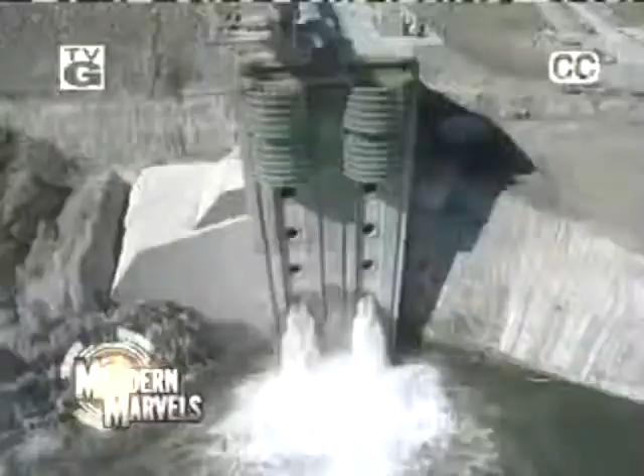It takes water to make cities grow. And without water, cities would die. New York, Chicago, and Los Angeles need billions of gallons a day, from rivers and reservoirs to the water tap. A vast hidden network of tunnels, pipes, and pumps. Some are cutting edge, and some are a century old. Now, City Water on Modern Marvels.

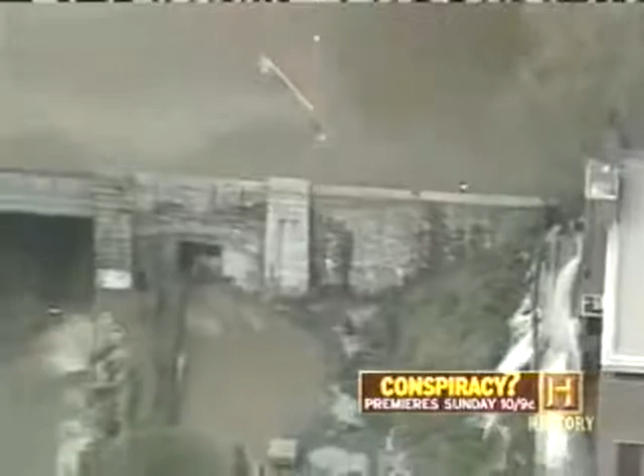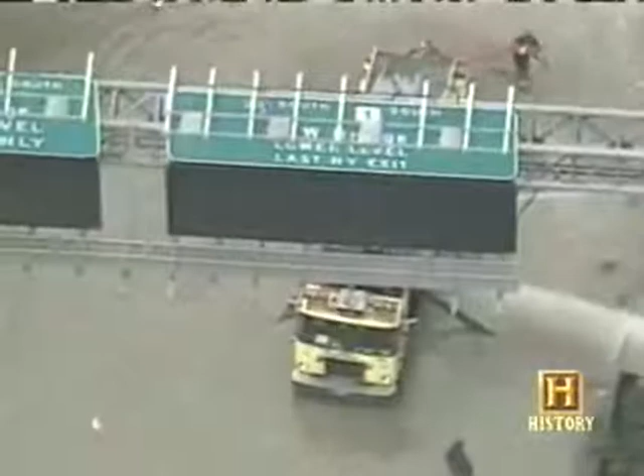October 2003. A 108-year-old New York City water main carrying more than 1 million gallons an hour suddenly burst, and swirling whitewater rapids surged through an area of several square blocks. The disruption, dislocation, and damage were dramatic. The incident pointed out how fragile and yet indispensable city water systems are. Most of us take them for granted until there's a problem.

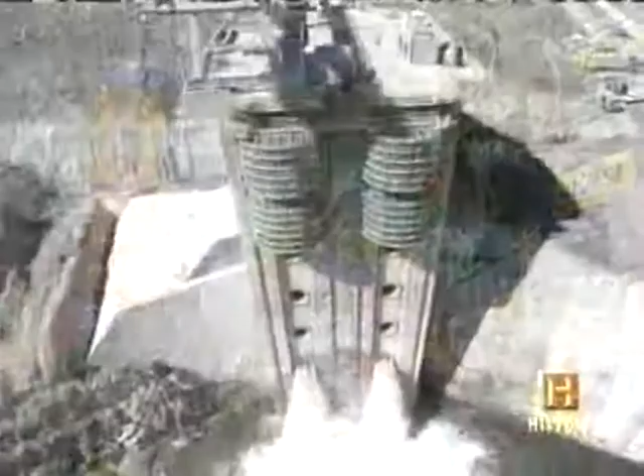When most Americans turn on a faucet, they expect clean, pure water to flow out. They also expect their city to have plenty of water for industries, for fighting fires, and for cleaning streets. Public water supply systems in the United States provide all those things for 99% of the population. Over 250 million people. Water supply is empowering. There are so many things that can happen when you have a water supply, and so many things that don't happen when you don't have a water supply.

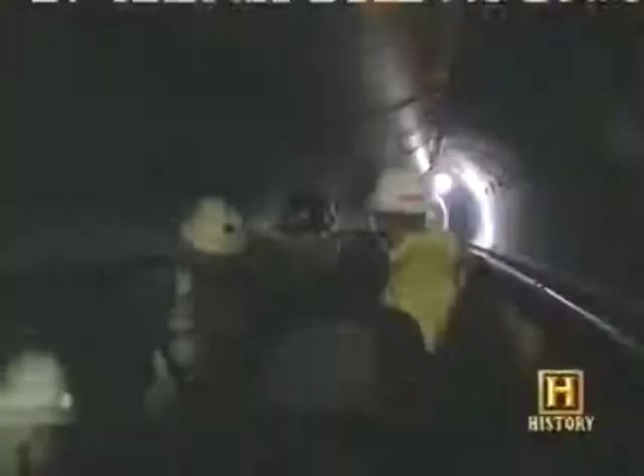On average, Americans use about 100 gallons of water per person every day. And public water works in the U.S. supply about 40 billion gallons daily. It truly is an invisible empire. There are thousands of miles of these aqueducts and tunnels all underneath the city, crisscrossing and moving. There's very little space down there. They've built so much. And like the men who built the skyscrapers up, these guys have built the skyscrapers down. Some of the technology used in today's city water systems has been around for millennia.

Sanskrit writings from 4,000 years ago talk about the importance of purifying drinking water and describe various methods, including boiling over a fire and filtering through sand or charcoal. 2,700 years ago, qanats, sloping tunnels carrying groundwater, were being used in northwestern Persia. The qanats are basically horizontal wells that are used for irrigation. These were developed originally in what's today Iran. They spread throughout the area into areas like Spain, into parts of China.

Around 312 BC, 4 centuries after qanats first appeared in Persia, construction on the renowned aqueduct system of ancient Rome began. An extraordinary feat of engineering. They brought water to the city from as far as 57 miles away. Over a period of 500 years, 11 aqueducts were built to bring water to Rome, and some sections are still functioning today.

Ancient Mayans in the Yucatan Peninsula got their fresh water from naturally formed underground sinkholes called cenotes, to which they attached great religious significance. The Maya considered the cenotes portals to the underworld, where they would journey in the afterlife to meet gods and ancestors. Probably the most well-known one is the cenote at the big site of Chichen Itza in Yucatan State. And this has yielded a tremendous amount of materials, offerings that were tossed in over the years. Fancy pottery, and very late in the history, gold, and a few humans, for good measure.

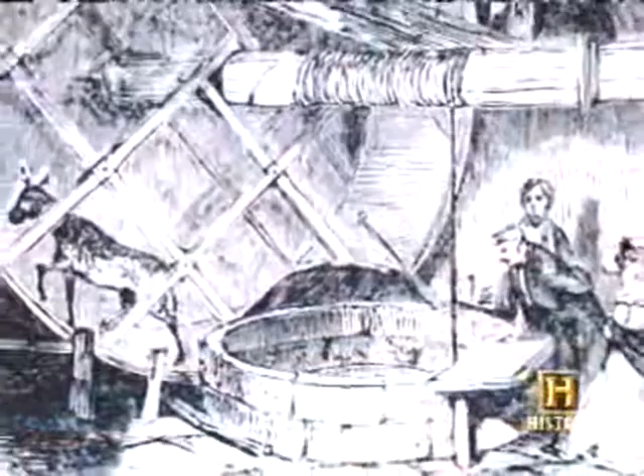Residents of medieval London might have been envious of the Mayan reservoirs. At the beginning of the 13th century, the increase in London's population was creating a growing pollution problem in the existing water supplies, which came from local wells and the Thames River. Across all of London there were these cesspits, and there were, of course, these wells, sometimes right next to each other, in ways that were just extraordinary. In 1236, construction was authorized on the Great Conduit, which would bring drinking water to the city from a spring at Tyburn, 3 miles away.

Eventually, several conduit houses were built in London. The stone buildings were not only used for storing and dispensing water, they also served as social centers. This was a place where people gathered during festival times. They decorated the sides with garlands, they painted slogans on it, and on real special occasions, like the coronation of Anne Boleyn in 1533, they stopped the flow of water and put wine in so that everybody could have wine delivered to them.

Still, many Londoners continued to get their drinking water from the Thames River, despite the pollution from human and animal waste dumped in the river. The resulting illnesses weren't associated with the pollution because of lack of knowledge of the microorganisms that cause disease. Sometimes the night air was blamed for certain types of death that would come.

Every summer it was almost regular, however, that the so-called sweating sickness would come in, which is probably a type of typhoid that we know now. But they didn't know it. Like the residents of medieval London, early New Yorkers were completely unaware that their drinking water was making them sick. And thousands would die of waterborne diseases, like cholera, before they made the connection.

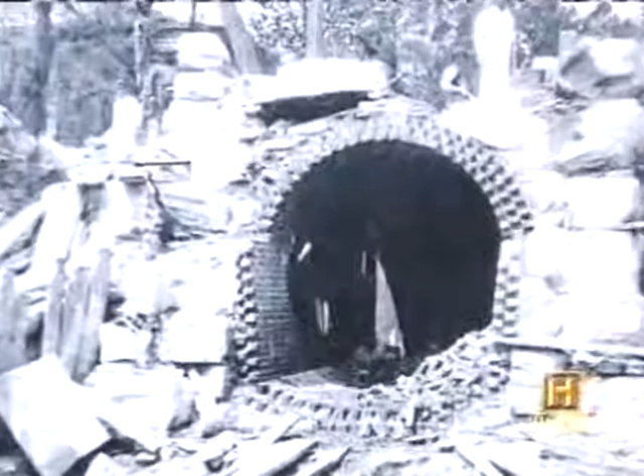The attempt to bring fresh water to New York City would lead to some of the great water projects of the 19th century. Manhattan's fresh water initially came from shallow private wells, until the first public well was dug in 1677, in front of the old fort at Bowling Green. By the late 1770s, Manhattan's 22,000 residents were getting most of their drinking water from the highly polluted Collect Pond in the heart of the city.

Because people were bathing in the Collect, it quickly became dirty. It became incredibly fetid. There was a dead body which occasionally washed up in it from a crime scene. People would find dead animals, feces. The contaminated water led to a disastrous cholera epidemic in 1832. It went from hundreds and then into the thousands of people who died from that epidemic. Kids would plead for water, and the water that they would give them was the very thing that was making them sick and only made the epidemic worse.

The situation deteriorated even further in 1835 when a small fire broke out in a single building on Wall Street. It was a cold winter night. Wells were frozen over, and so were the rivers. And within 24 hours, all of Lower Manhattan was ablaze and in ruins. Millions of dollars equivalent were lost from business and industry. One of the worst disasters in the history of the United States.

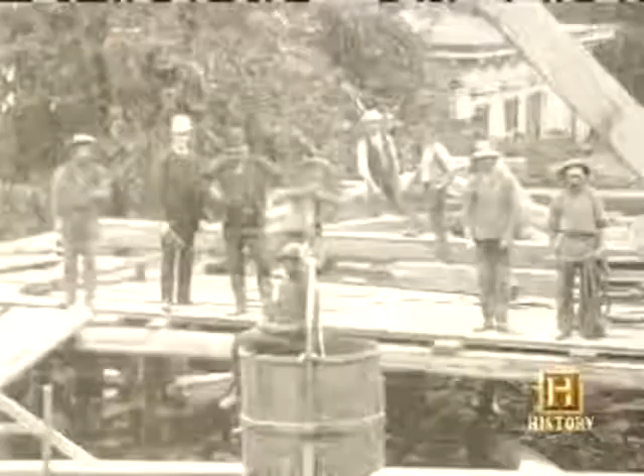And it was these events, these really cataclysmic events, that finally set New York on a concerted program to say, we need to solve this crisis. How can we do it? In 1837, construction began on the Croton Aqueduct, which still carries water to New York City today, providing about 10% of the city's water supply.

The 30-mile-long brick pipeline, extending from the Croton Reservoir along the east bank of the Hudson River to downtown New York City, took 5 years to complete, with up to 4,000 laborers on the job at one time. In 1842, when the aqueduct finally went into service, President Tyler and former presidents John Quincy Adams and Martin Van Buren came to the Big Apple for the opening ceremony and watched water gush for the first time from the Croton Fountain near City Hall.

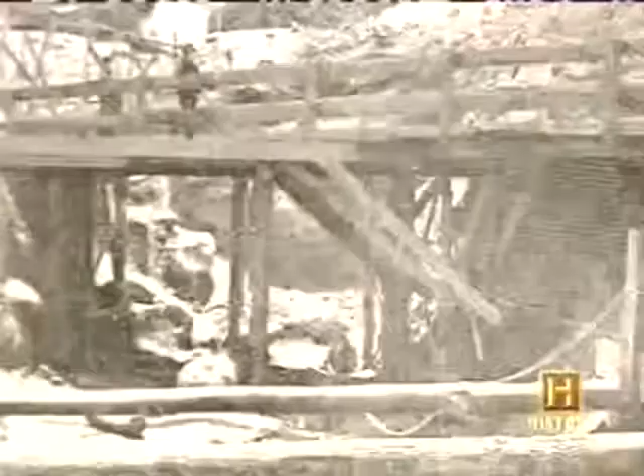People recounted in elaborate fashion their first bath, their first shower. It's hard to imagine what it was like to be able to go into your house, turn on a tap, and have water. The Croton Aqueduct was considered an architectural marvel. Most of it was an 8-by-7-foot arched tube of brick and stone, buried 15 to 30 feet beneath the ground.

But there were elevated sections like the High Bridge, an arched brick overpass that took the aqueduct across the Harlem River to Manhattan. It became a popular tourist attraction in the late 1800s, with sightseers traveling 8 miles from the city to stroll across the 1,400-foot-long span.

Then, as always happens, because of the supply of water, because of the nature of New York City, the city quickly expanded, and already within 12 years, there was an editorial in the New York Times saying, we need more water, we need more water. When you think of the immigration that was occurring in the end of the 1800s, New York was just exploding, and that Croton network just wasn't able to meet water supply demands.

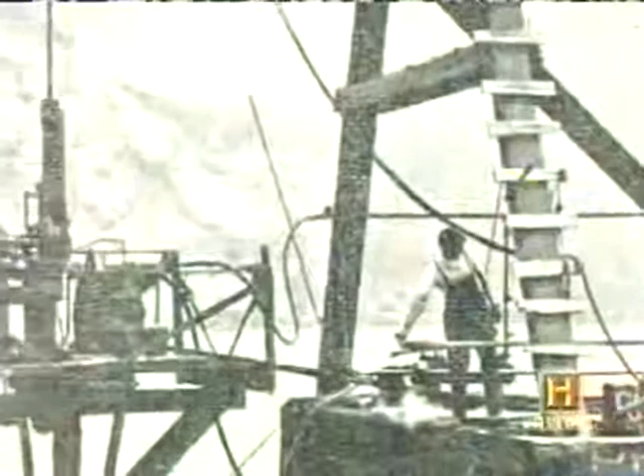And this time, they looked even further afield, and this time, their plan and vision was even bolder. What they did is they decided to build an aqueduct all the way out to the Catskill Mountains. The new aqueduct from the Catskill Mountains would be 92 miles long, 3 times as long as the Croton Aqueduct. It would run down alongside the Hudson River and at one point cross the river.

This is another hand-built aqueduct. This was the working man. Down there with sticks of dynamite and steam locomotives and mules hauling all that rock out. With the Croton Aqueduct, they decided to cross the river in the aqueduct above the river.

With the Catskill Aqueduct, they decided to go beneath it. And for over a year, they would sit on these boats pitched in the river, often in storms and rain, trying to do soundings, trying to literally lower things down to figure out where the bottom of the river was so they could decide how far they had to dig down on the banks to get underneath it.

And there was at one point people and engineers raised their hands in frustration and they said, this river's bottomless. But eventually the city's engineers did find the bottom of the river and made the daunting discovery that they would have to tunnel at a depth of 1,200 feet to get to the solid and stable bedrock beneath the river. It was a task that seemed impossible, but they would have to find a way.

What they didn't know is that the system they were building had an Achilles heel, a potentially fatal flaw that has New York City engineers worried today. Only 1% of the fresh water consumed daily in New York City is used for drinking water.

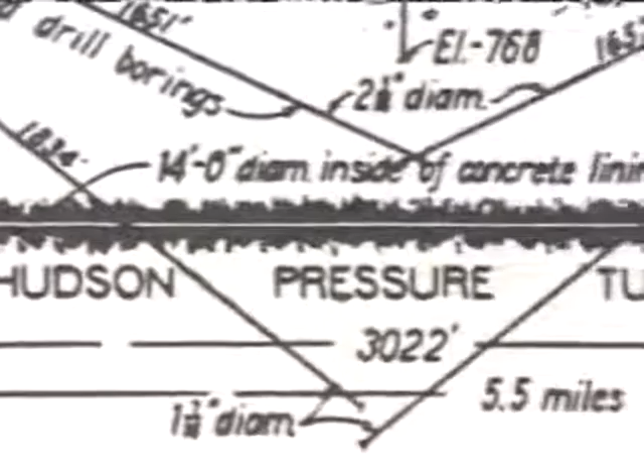When New York City water engineers set out in 1907 to build a new aqueduct from the Catskill Mountains, one of the most difficult challenges was digging a tunnel deeper than they had ever dug before. In order to cross underneath the Hudson River, they would have to tunnel at a depth of 1,200 feet. 1,200 feet is nearly as deep underground as the Empire State Building is high. So it gives you some sense of scale of how enormous the engineering was to do this.

And so what they did is they started to dig from both banks, literally from the sides, and they began to dig like an inverted triangle coming down like this until the two sides literally met 1,200 feet beneath the river, almost like a pincer.

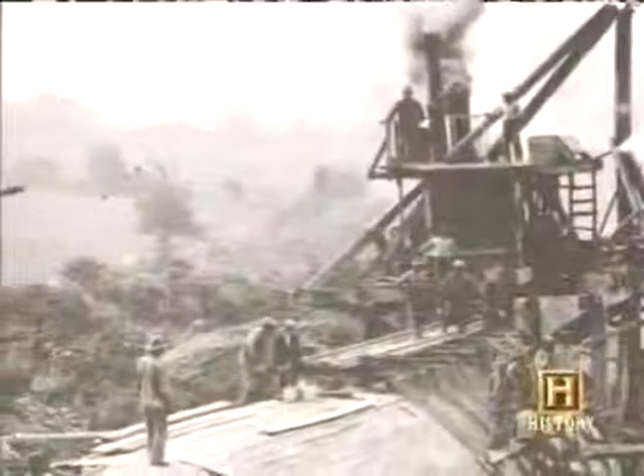After crossing under the Hudson River, the new aqueduct would flow into City Tunnel Number 1, a huge new tunnel that would run the length of Manhattan, 900 feet deep. Work on the 18-mile-long Tunnel Number 1 began in 1911 and went on for 6 years. When completed, it would be the longest tunnel of its kind in the world, capable of carrying 500 million gallons of water per day.

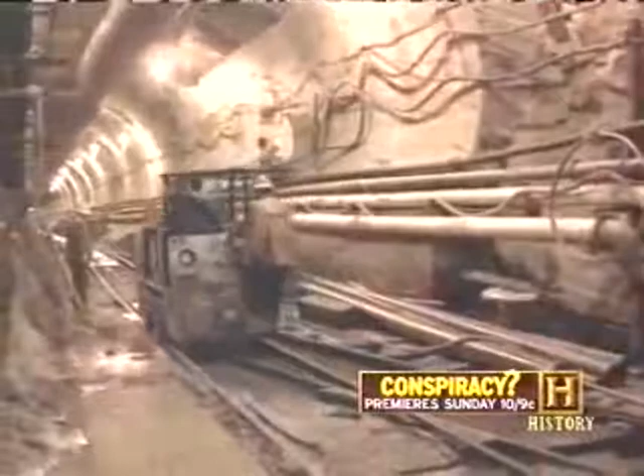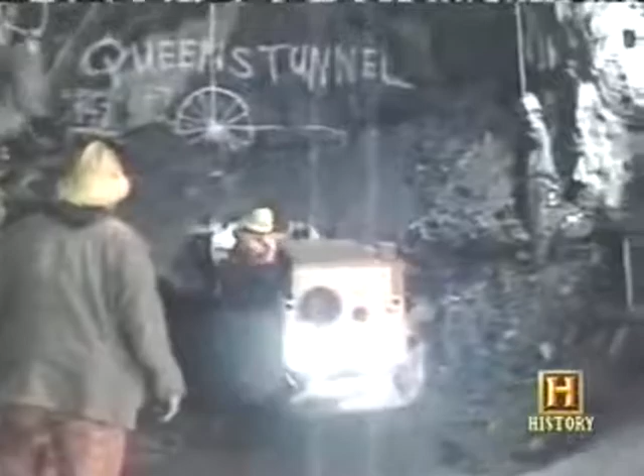The workers of Tunnel 1 were members of a proud profession that continues to build the New York City water system today. Known as sandhogs, they've been laboring underground, unknown to most New Yorkers, for decades. They got the name from their work in the sandy bottom of the East River, laying foundations for the Brooklyn Bridge. Starting at the absolute bottom of the economic ladder, the hardest, toughest, in a sense, most dangerous job out there that you could find. Fathers passed on those job opportunities to their children, and a culture grew out of that.

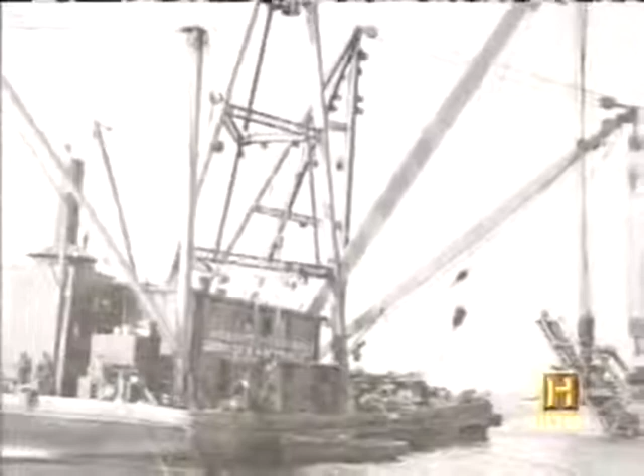Construction of the 11 to 15-foot diameter tunnel was particularly dangerous where it crossed the East River to carry water to Brooklyn. Natural groundwater made the ground so soft that the shafts in which workers descended to the tunnel became watery death traps. Every time they would dig, the soil would cave in on top of them. So what they decided they needed to do was to sink something called a caisson.

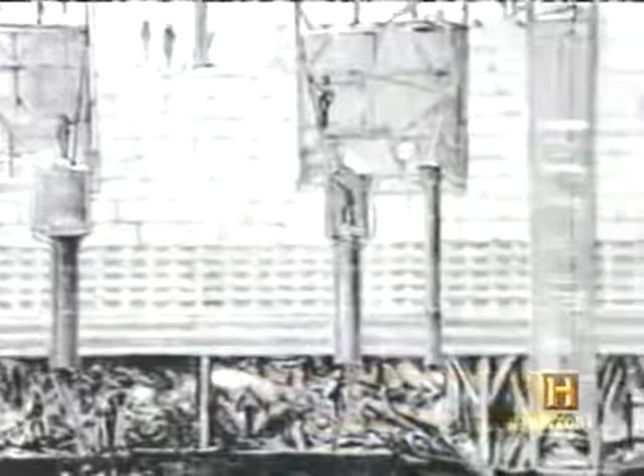Pneumatic caissons filled with pressurized air had been used earlier in the building of the Brooklyn Bridge. These concrete and steel structures weighed about 2,000 tons each. They were sealed on all sides except the bottom, and as they were lowered into the soft ground, compressed air was pumped in, pushing out the mud and water.

That pumping of the air created a real safety health hazard because it created an environment where the workers would get the bends, so they were only allowed to be down there for 2 hours. The bends, also known as caisson disease, can happen when pressure on the body is removed too quickly, causing the formation of nitrogen bubbles in the blood and tissues.

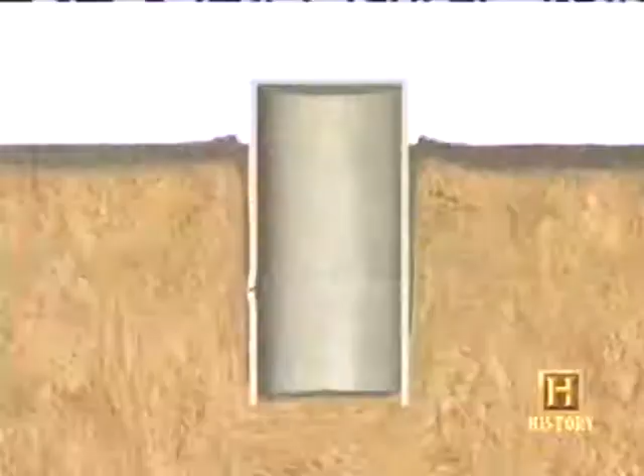Sometimes the intense air pressure would cause a dangerous blowout in the walls of the caisson. It was basically a high, shrill, kettle-like screeching, which would echo in the caisson. And basically it meant there was a rupture in the lining of the caisson wall, that the air was now escaping, created an incredible suction, and everything in the tunnel was going to be sucked towards a small opening. And because of the pressure, the opening could widen very quickly, and everyone would drop their picks and run.

Most of the concrete-lined Tunnel Number 1 had to be blasted through solid rock.

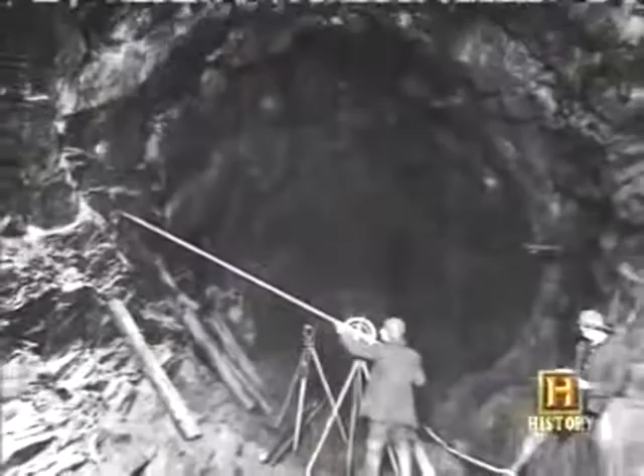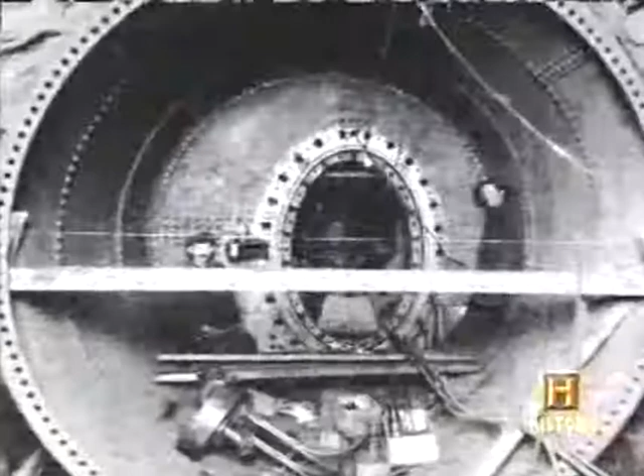During the first 3 years of construction, 10,000 pounds of dynamite were used daily. By the end of 1912, a total of 2.5 million pounds of dynamite had been used, and 14 workers had died in blasting accidents. The tunnel was finally finished in 1917, and a lavish opening ceremony was planned at a fountain in Central Park. Entitled The Good Gift of Water, the pageant had to be canceled because of rain.

Tunnel number 1 was an engineering triumph, but for a city growing as fast as New York, it would be inadequate within a few years. Over the next decade, population expanded eastward from the Bronx and Manhattan, and by 1929, water consumption was 35 million gallons a day higher. Construction began on tunnel number 2 to supply Brooklyn and Queens. The tunnel would be fed by a new aqueduct from the Catskill region.

It connects with City Tunnel number 2, which, together with City Tunnel 1, delivers all of New York's water to 8 million people in New York City. Obviously, they are of crucial importance. Without one or the other, half the city would be without water.

In the 1950s, New York City water engineers made a disturbing discovery when they tried to shut down a section of City Tunnel number 1 to inspect it. They had built valves in the bottom of shafts, and these valves, they would literally turn them. They almost look like a steering wheel on a submarine, sticking out of a hatch. So in 1954, the engineers go down, they start to turn the handle.

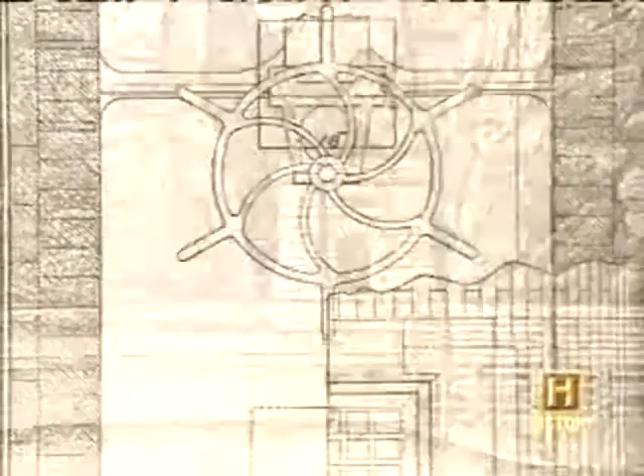And as they start to turn the handle, it begins to tremble, begins to shake. There's too much pressure on it. It's too old. The valve's corroded. They can't shut it off. They couldn't repair it. They couldn't even find out if it was about to burst or about to break. It scared the bejesus, as one engineer told me at the time, out of everybody.

If you lose this system, something that New Yorkers take for granted day in and day out, you'd have a very different New York City without water. And that is a daunting challenge, and one that makes the third water tunnel so critical. City Tunnel number 1 has been in continuous use without a shutdown for inspection or maintenance for well over 100 years. Hundreds of sandhogs are now fighting a crucial battle to complete a new tunnel as quickly as possible.

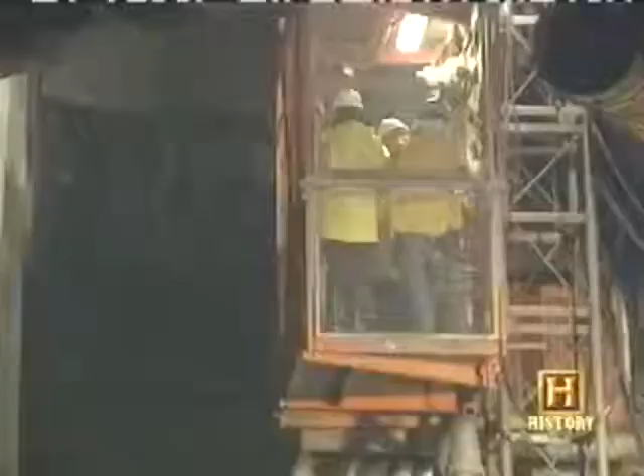There's no way to bring water to Lower Manhattan or from 59th Street down without tunnel number 1. Once we finish constructing the third water tunnel, we'll be able to turn off the first water tunnel, get in there, look at what its engineering challenges are for something that's 100 years old. People forget everything breaks at some point. A 100-year water tunnel at some point starts to fail, and you're now seeing the kind of snap, crackle, and pop within that system.

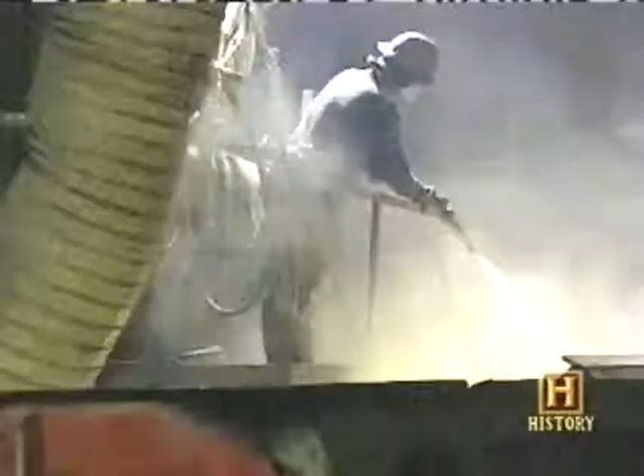Some of the sandhogs building tunnel number 3 believe the only thing preventing tunnel number 1 from collapsing is the pressure of the water pushing against its walls. One of the engineers and contractors told me, probably more starkly than anyone else, that what nobody knows is that we're facing a potential apocalypse. Those were his direct words. And so once again, an enormous project began, and it began in 1970. It became, for those who understood it, a race against the clock.

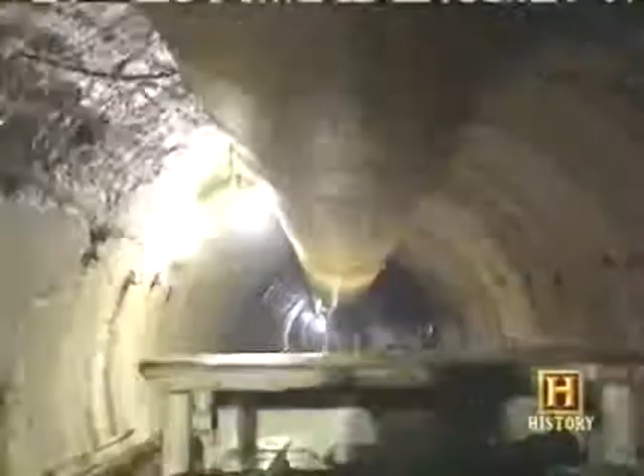No one understands that race better than the sandhogs of today, who are building City Tunnel number 3, many of whom come from a long line of tunnel workers. My uncle, my cousin, they were all sandhogs, and then you join with them. And I've been a sandhog for 27 years. When I went down there the first time, it was exciting. I said, wow.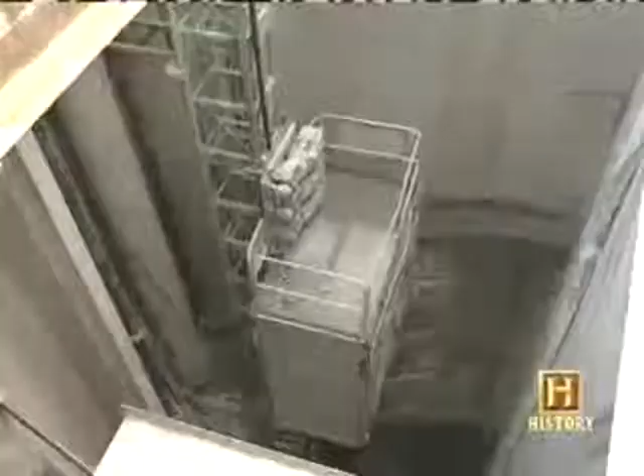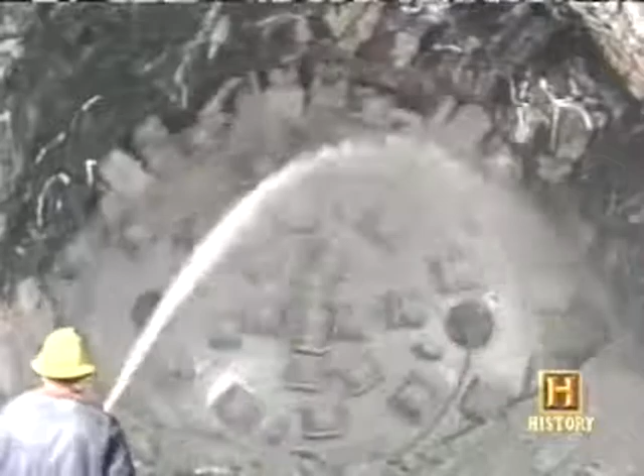Sandhog Scotty Chessman has a PhD in geology. After working as a geologist for the city, he decided to go back to the job he loved best. When you get down there, it's the root core of the Appalachian Mountains, anywhere from 1 billion years ago to 400 million years ago. If you're going through here, you see a beautiful cross-section of what it was like, the physical activity that took place, the deformation, the heat and pressure, and the imprint on the rock. And it changes as you go along. It's almost a PhD thesis every 100 feet.

The 60-mile-long tunnel number 3 will extend from Yonkers through the Bronx down to the southern tip of Manhattan, and then over to Brooklyn and Queens.

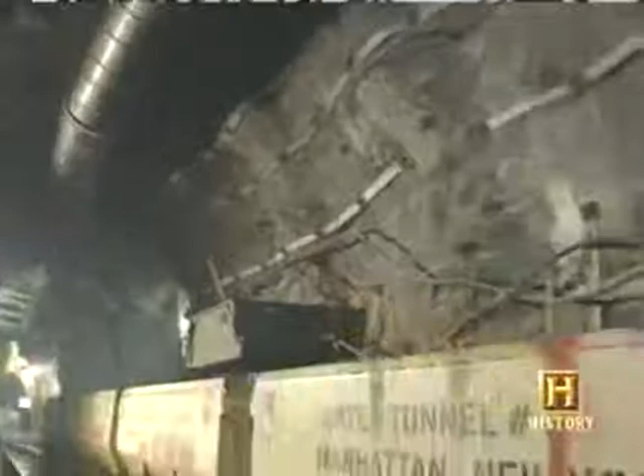Longer, wider, and with more sophisticated control systems than its two predecessors, its construction ground to a halt for nearly a decade after New York City went bankrupt in 1975. And it's not scheduled for completion until 2020. It's being carved out by a gigantic machine, similar to the one that dug the Channel Tunnel from Britain to France, called a TBM, or tunnel boring machine.

It has a large head, 13 foot roughly in diameter, and it has a bunch of cutters on it, and they press up against the face at 1.5 million pounds of thrust, which comes out to roughly 65,000 pounds per cutter. This tunnel boring machine has these large grippers. It locks it out on the wall. It has these large hydraulic cylinders that push the head forward, and the head rotates and presses on the face and creates these chips.

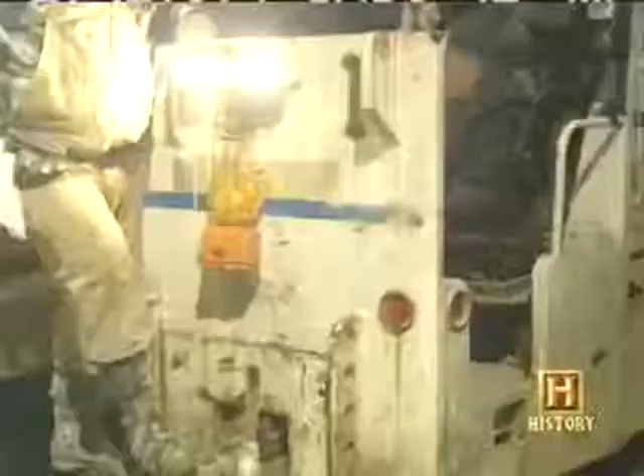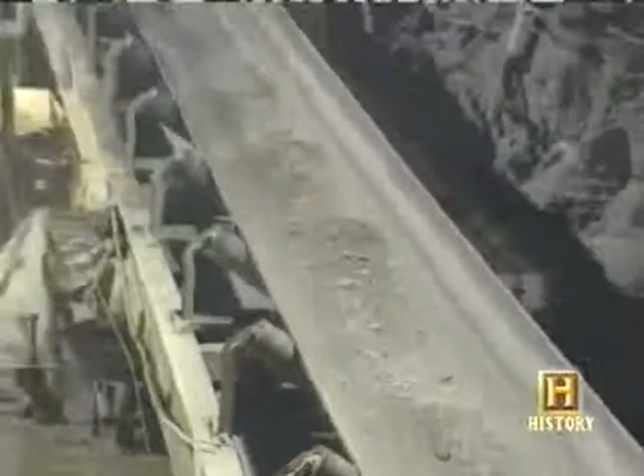As the TBM moves forward, it's up to the sandhogs to clear out the chipped rock it creates, which is called muck. Now this is the actual muck. This is the last conveyor of the system, you see. And it's muck. You can see some chips in it, but it's pretty finely ground. So the muck you're seeing right there probably came from the heading 8,000 feet ahead of us probably 20 minutes ago.

There's always one last thing to do before getting on the elevator for the 600-foot trip down. This is a check-in, check-out board. It's an OSHA requirement. If there's ever an accident down there, we'd like to know how many people are down there if you have to rescue anybody. So it's a requirement that you flip over your tag. So as I'm going in, I'll flip over my tag to red, and that indicates that I'm in the tunnel.

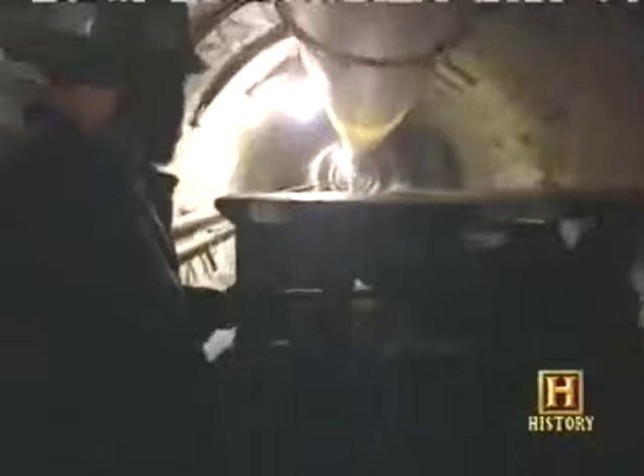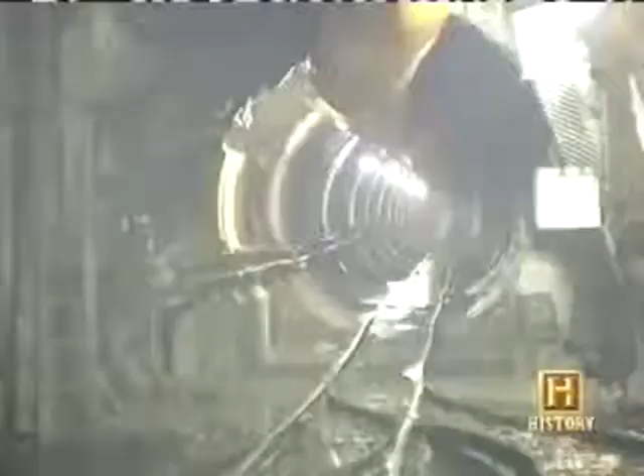24 sandhogs have died in the construction of Tunnel Number 3. Some believe they may have given their lives to prevent a catastrophe. If one of those systems collapsed over the next 20 years, it would be a disaster of mega proportions that would overshadow all the disasters combined. It would truly be a calamity. The stakes are as high as they've ever been. They're as high as they were in the 1830s. People just don't realize it because the water is still flowing.

While we're building the third water tunnel, we definitely and unequivocally do not expect catastrophic failure in the near term. But if you don't do it now and you don't start building it now, it's definitely going to be a place where that risk is really facing the city.

The city of Chicago has never had to look far for its water supply since it's situated on one of the Great Lakes. But it did have to build the largest purification plant in the world to keep its drinking water clean. New York City residents consume an average of 1.1 billion gallons of water a day. That's about 300 million gallons less than in 1988, when the city launched a major conservation campaign.

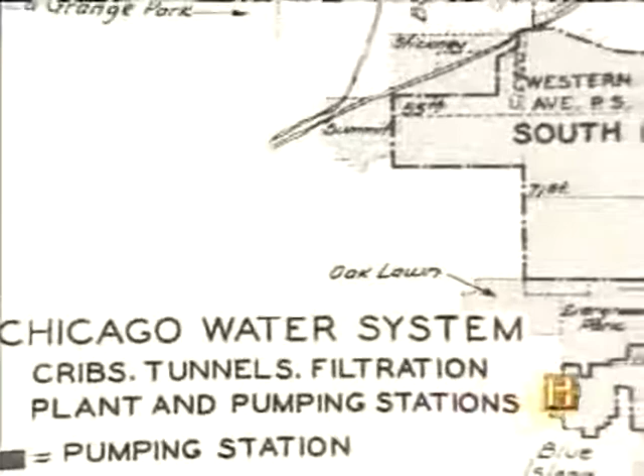This is a wood water main, which we estimate to be over 100 years old. It's typical of what it was prior to 1850. This one appears to be coated with some type of tar, which would probably be typical of what they would do when they installed them. In 1864, the city started construction on an engineering project that made headlines around the world.

A tunnel that extended 2 miles out into Lake Michigan, the longest tunnel ever bored up to that time. The tunnel was dug through clay 60 feet below the lake's bottom and was lined with brick to a finished diameter of 5 feet. A pentagon-shaped wooden building called a crib, which would protect the intake shaft from ice and the elements, was built onshore, towed out into the lake, and sunk to the bottom.

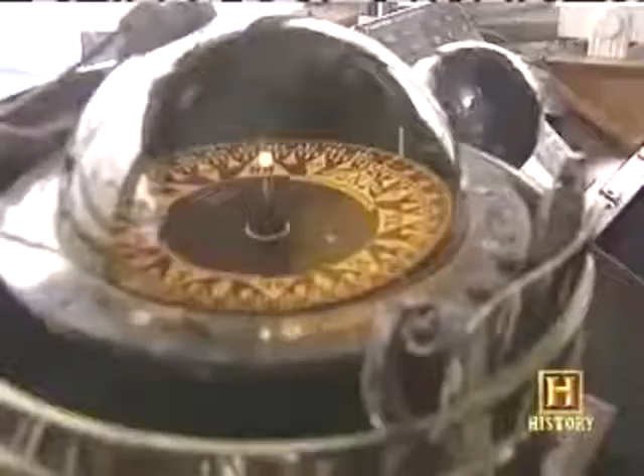The term crib came from the wooden pilings which were sunk into the lake bed. 30 years later, the wooden building was replaced with a brick one, but the term crib remained, and the Carter Harrison crib is still there today. The Chicago Water Department tug, which is also an icebreaker, makes regular trips to maintain it.

Modern Marvels went aboard with Richard Rice, the head of the Chicago Water Department, for a trip to the Harrison Crib, which looks much as it did when it was built over 100 years ago. Plaster walls, wood trim. We have living quarters for about 19 individuals who may be out here at any given time during the year to do work.

In the early days, there was always somebody at home at the crib. We actually had a crib tender. That was actually a title in our budget, a crib tender who lived here 24 hours a day. Rumor has it that they had the best meals in town cooked out here.

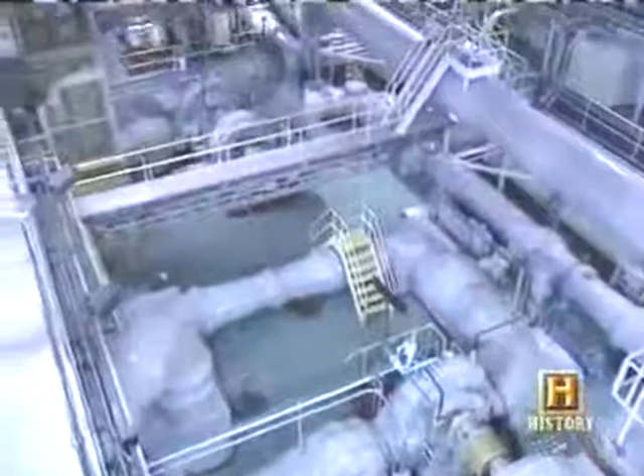The shore end of the tunnel was connected to a new pumping station that opened in 1869. It had the capacity to pump 18 million gallons a day, which was 60% more than the city needed at the time. The Chicago Avenue pumping station is still an essential part of the downtown water system, with a total of 6 working pumps that can produce 200 million gallons a day.

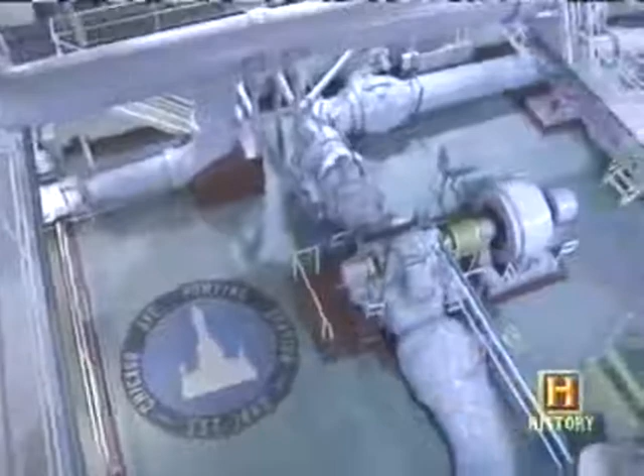The original pumps were steam-driven. We've converted and modernized the station. These are one of our older electric pumps. This pump that we see here will be pumping 30 million gallons per day. The Chicago Avenue pumping station, which now includes a restaurant and a theater, and the historic water tower across the street, have become major tourist attractions in downtown Chicago.

For a while, the 2-mile-long water tunnel under Lake Michigan provided an abundant supply of clean, fresh water for Chicago. But as the city grew, tanneries, glue factories, and other new industries belched effluent directly into the Chicago River, which was already polluted with sewage. By 1890, Chicago sewage was flowing all the way from the Chicago River to the intake crib 2 miles offshore. Chicago was hit by outbreaks of dysentery and typhoid.

To keep pollution out of the lake, the city broke ground in 1892 on the largest earth-moving project of its time, the 28-mile-long Sanitary and Ship Canal, which was larger than the Suez Canal in Egypt. The canal reversed the flow of the Chicago River, making it the first river in history to flow away from its mouth. 8,500 laborers used mule-drawn plows, steam shovels, and dynamite to move nearly 30 million cubic yards of earth.

Reversing the river's flow led to a dramatic reduction of pollution in Lake Michigan, and by 1908, Chicago's typhoid rate had dropped 91%. Chicago eventually built more intakes and cribs to bring water from Lake Michigan. They include the still functioning Dever Crib, located beside the old Harrison Crib, and connected to it by a steel walkway.

In 1935, the Dever Crib was completed, and that was actually a 16-foot concrete-lined pipe that is beneath the floor of Lake Michigan at a depth of about 150 feet. The Harrison Crib, taken out of service in 1998, still serves as the living quarters for maintenance crews working on the Dever Crib.

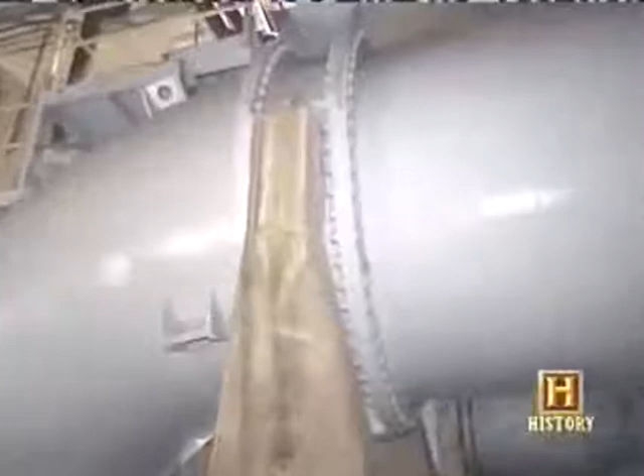As Chicago's population grew, a large purification plant became necessary. The Jardine Purification Plant, designed to filter and treat more than 1 million gallons of water per minute, was completed in 1964. It's the largest water treatment plant in the world. Huge pumps bring lake water from the Dever Crib into the plant, where it goes through a vast system of sand and gravel filters to remove impurities, called particulate.

Each one of these filters is a conventional rapid sand filter. It's basically a couple feet of gravel topped by a couple feet of sand, and the water travels through the sand and is filtered. It will trap most of the particulate on the top. Aluminum sulfate is added to cause particulate to coagulate into larger particles called floc. This happens in flocculation basins, where a large paddle wheel stirs the mixture.

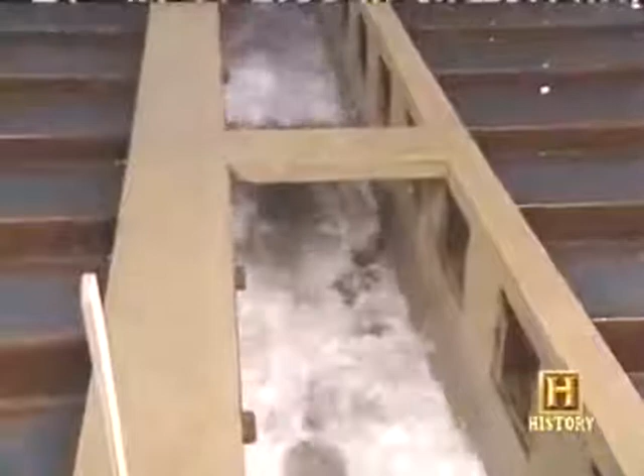Each one of these flocculation basins has 4 passes where we slow stir the water to form the floc before it starts its journey through the settling process. Several other chemicals are added to the water before it leaves the Jardine plant. They include chlorine for disinfection, fluoride to fight tooth decay, and blended phosphates to prevent corrosion in water mains and pipes.

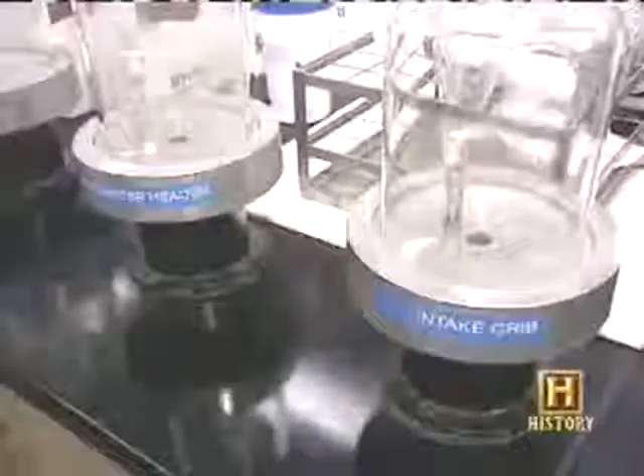In the plant's testing laboratory, technicians perform numerous tests to monitor the quality of the water 24 hours a day, 365 days a year. Millions of samples are taken at the plant every year to ensure that the water meets the standards of the Safe Drinking Water Act. The incoming raw water is also monitored for unpleasant tastes or odors.

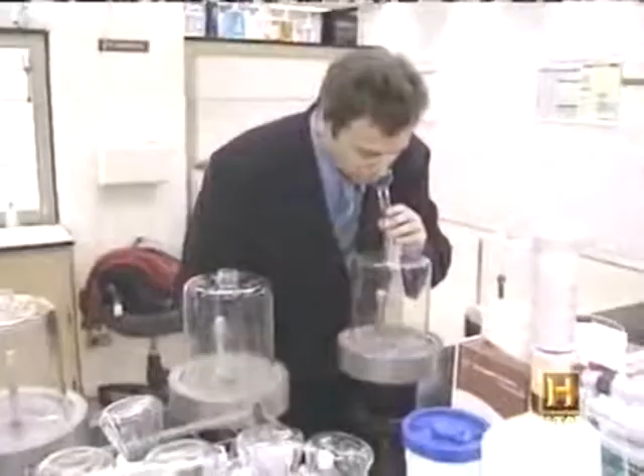With the odor monitors, we basically use the human nose. In raw water, you may smell an earthy smell, you may smell a fishy smell, you may smell a moldy smell, you may smell chemical or a phenol smell. If the water fails the sniff test, the Jardine plant will add powdered activated carbon, which can remove tastes or odors. Tiny carbon particles are extremely absorbent, like sponges.

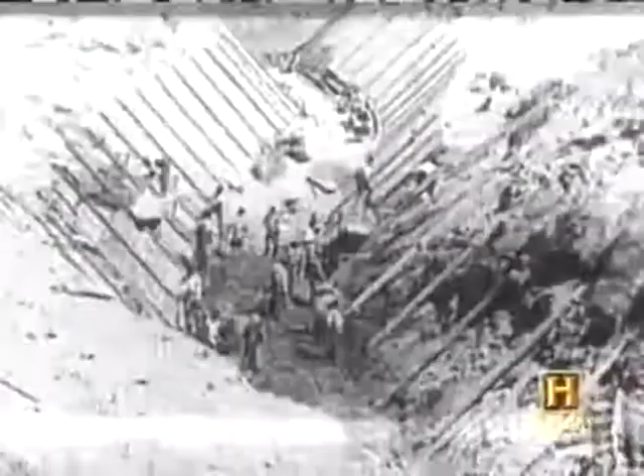After the water has completed the treatment process, it flows by gravity through our outlet tunnels to our 12 pumping stations located throughout the city. Chicago's location on Lake Michigan means it has a huge supply of fresh water on its doorstep. Los Angeles has no such luck. So finding the water necessary to turn this patch of semi-arid land into America's second largest city has never been easy.

The Chicago Avenue Pumping Station and Water Tower were the only public buildings to survive in the area destroyed by the Chicago Fire of 1871. City water will return on Modern Marvels.

Diamond Valley Lake Reservoir, about 80 miles east of Los Angeles. It was the largest earthworks construction project in U.S. history and one of the boldest ideas for water storage ever conceived. The Metropolitan Water District and the engineers there looked at what was essentially a ring of mountains and said, what if we connected them? And so they created a bowl that is elevated to the mountaintops. It's an extraordinary idea. Unlike most dams, a river does not run through it.

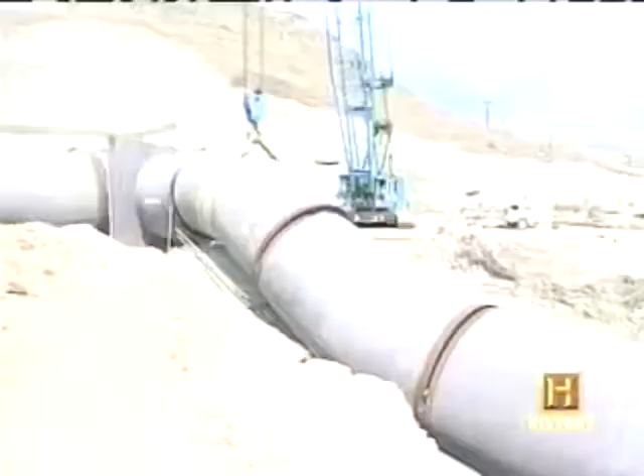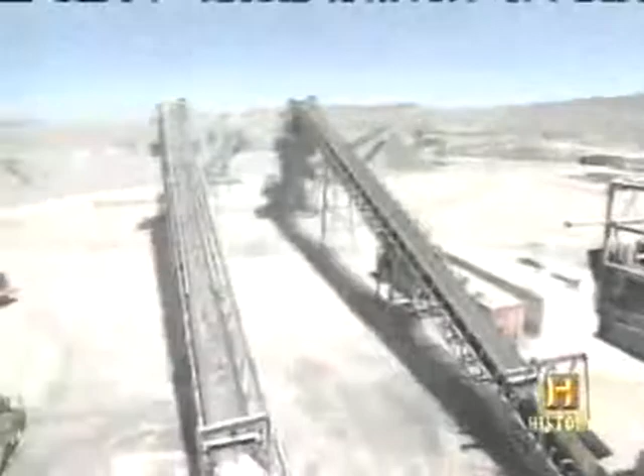Water for the huge reservoir comes by pipeline from the state water system in California's Central Valley and from the Colorado River. The Diamond Valley Lake Reservoir has doubled the water storage capacity in Southern California. Construction began in 1995, and the reservoir was completed 5 years later. $100 million worth of earth-moving equipment, including some of the largest dump trucks in the world, was used to carve out nearly 150 million cubic yards of soil and rock.

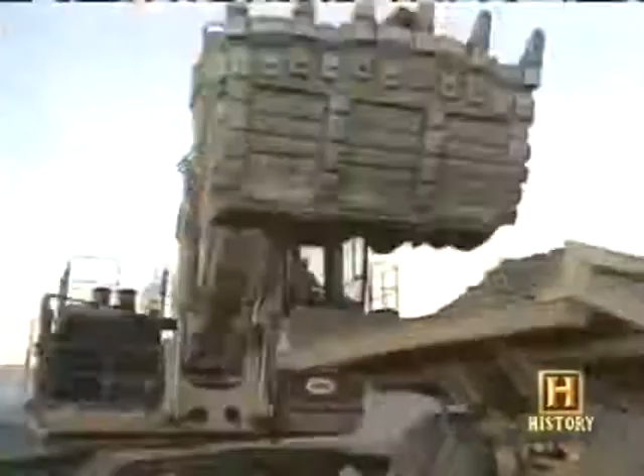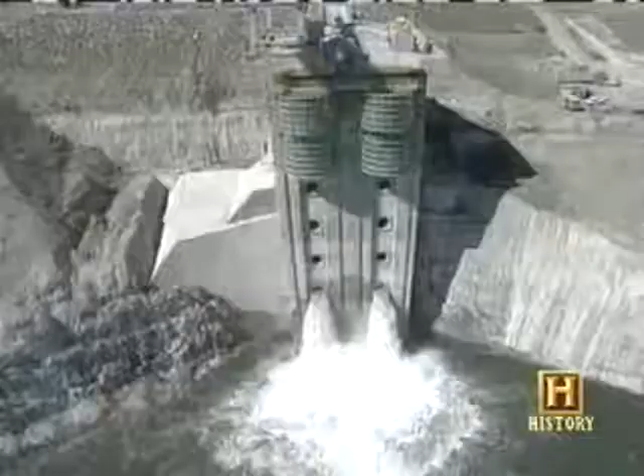When you put that on a scale of those kind of projects that have been done worldwide, that's seventh largest in the world in terms of moving that amount of material, but we did it quite fast. And we were moving enormous volumes of earth and rock every day, 20 hours a day, 6 days a week for 4 years to do that. Once the dams were completed, the next step was to fill the reservoir with water. With a capacity of over 250 billion gallons, it took more than 2 years to fill it up.

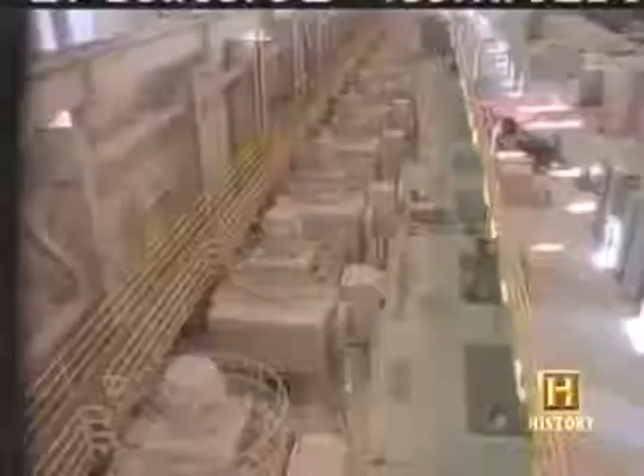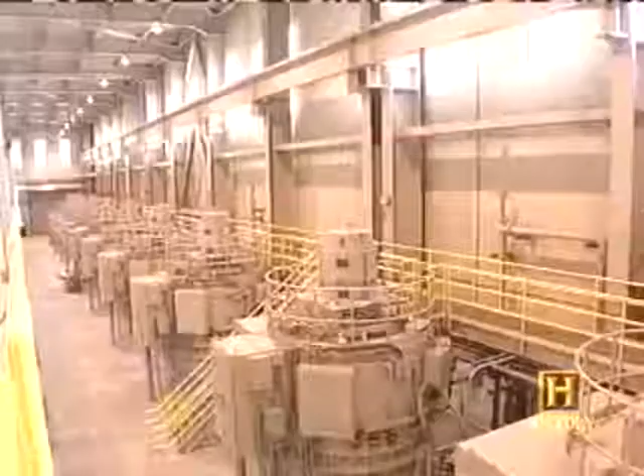The Diamond Valley Lake project includes a large pumping station to get the water into the reservoir. The pumps actually draw off that smaller lake or that pumping pool and push water through the mountain that we're standing on to an outlet tower, which allows the water to be delivered into the lake. The pumping station contains some of the largest variable speed electric motors that have ever been built. The variable speeds allow them to adjust to changing water levels in the reservoir. Motors can also function as generators when the flow of water through the pumps is reversed.

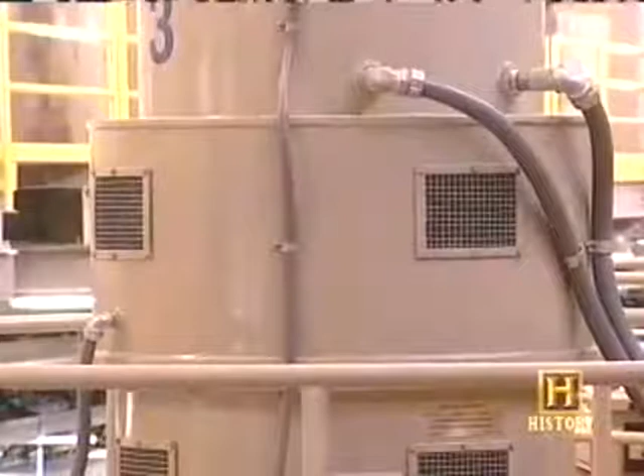Each of the 12 motors is a Westinghouse 6,000 horsepower motor. They were built in Texas, and they were transported here and then placed on top of the Mitsubishi pumps. They're capable of pumping 175 cubic feet per second. Now, the unique thing about these particular units is they're also capable of running in a generator mode, in which case we can produce 3.3 megawatts of electricity when they're in gen mode. The Diamond Valley Lake project is a visionary investment in the future. As with projects launched by California water planners decades ago, it's expected to pay huge dividends.

If ever there was a city built by water, it's Los Angeles. We've always used water in California as a means of removing the natural limits. Clearly, God never intended large numbers of people to live in the Los Angeles basin. It's a semi-arid plain. And yet the accidental truth about the development of California is that everyone came west initially for the gold rush and then turned left, going south to the area where the water was not.

The story of the early growth of the LA water system is largely the story of one man, William Mulholland, the first director of the city's water department. He was an immigrant from Ireland who first worked as a ditch tender for the city. He's very rough, uneducated, not trained as an engineer, but he's supremely confident. By the age of 31, Mulholland was head of the Los Angeles Water Department and searching desperately for new sources of water for the city's growing population. That water would come from the Owens River, more than 200 miles to the north.

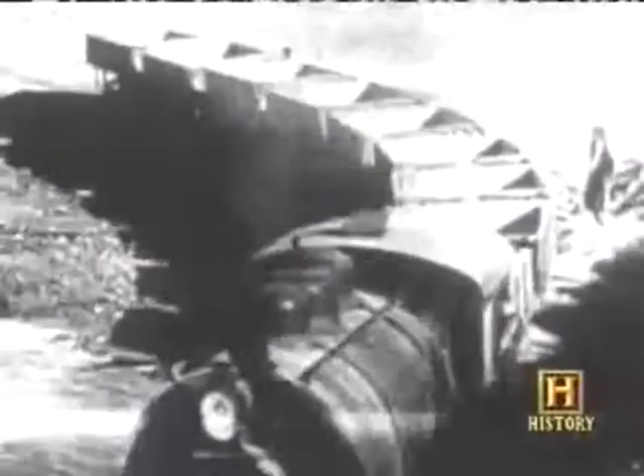Construction on the 233-mile-long Los Angeles Aqueduct began in 1908 after a newspaper campaign to get Los Angeles residents to support the idea of a public bond issue to pay for it. Simultaneously, the city fathers announced the existence of a drought that no one had noticed before. But in order to float the bonds that were necessary to secure voter approval, it wasn't enough simply to say that there was an abundant supply available for future needs. What followed then was a largely fraudulent, as it turns out, campaign, but only the first of many by which the fear of an impending drought was used to create popular support for new waterworks.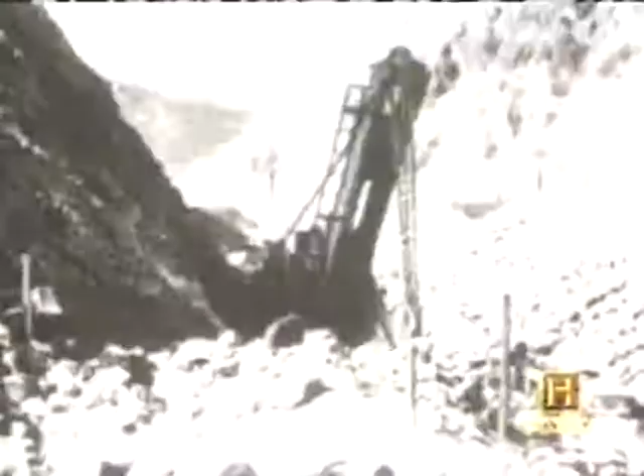With the financing in place, construction finally began on 34 miles of open unlined channel, 39 miles of concrete channel, and 98 miles of covered concrete conduit. Some of the conduit was big enough to drive a car through. 6 million pounds of blasting powder were used to build the aqueduct. When it finally went into service in 1913, bottles of Owens River water were handed out to the 30,000 celebrants who traveled by car, wagon, and buggy to the opening ceremony at the San Fernando Reservoir, north of the city center. Although residents of Los Angeles welcomed the new water supply, farmers in the Owens Valley weren't too happy about having millions of gallons of their water siphoned off daily.

In 1923, both the city and the Owens Valley area were experiencing water shortages. Confrontations escalated, and there were incidents of sabotage. During the 1920s, there were 10 attempts to blow up the aqueduct with dynamite. The construction supervisor at Diamond Valley Lake, Dennis Majors, recalls his grandfather's stories of patrolling the aqueduct on horseback with a rifle to prevent sabotage.

They had to get out there every day early in the morning, starting at 5 o'clock, and head 25 miles in one direction, patrolling that thing. They did tell me, well, they never had to arrest anybody, but they probably got close from time to time. He carried an old 1870 Winchester 25-35 with a scabbard on his horse, and maybe that had some effect on not having to arrest anyone.

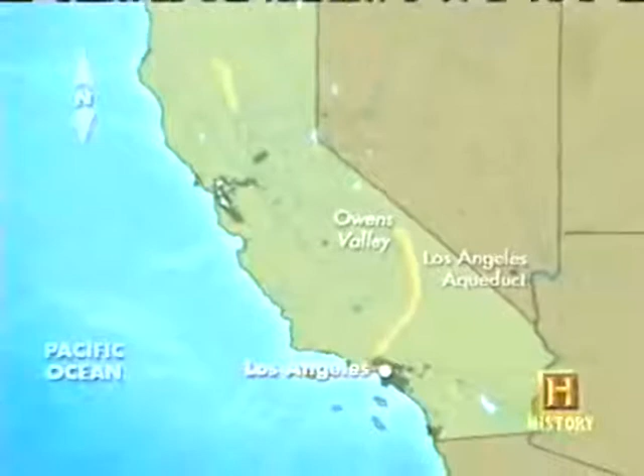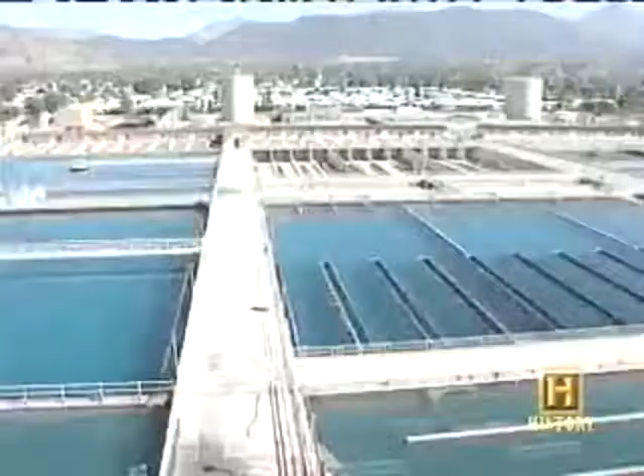Because of the city's huge population growth, Los Angeles now relies on a complex system that delivers water not only from the Owens Valley, but also from the Sacramento and San Joaquin rivers via the California Aqueduct, and the Colorado River via the Colorado River Aqueduct. The water sources are coordinated by the Metropolitan Water District of Southern California. Formed by Los Angeles and surrounding municipalities in 1928, the MWD now encompasses an area from Ventura in the north to San Diego in the south.

Not just Los Angeles, but its child, the Metropolitan Water District, have always built way ahead of demand, have more water than they are likely ever to need, and have been able to survive the droughts that have struck California in the last 20 years in far better condition than many other parts of the state.

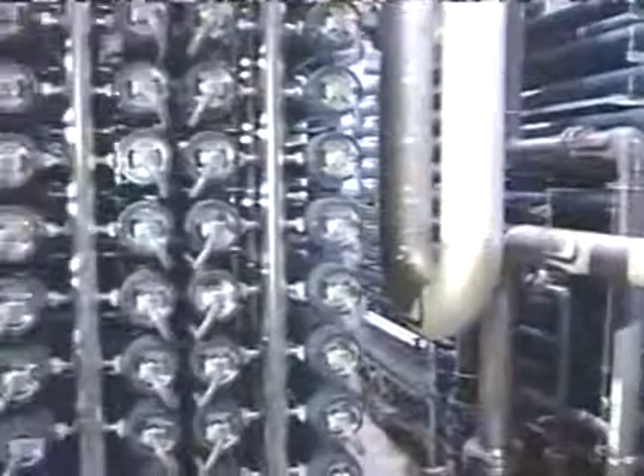One huge untapped source of drinking water for California is the Pacific Ocean. Desalination plants can change seawater into fresh water, but the only plant doing it on a large scale is 3,000 miles away from Los Angeles. The Metropolitan Water District of Southern California provides residents with up to 800 billion gallons of water every year.

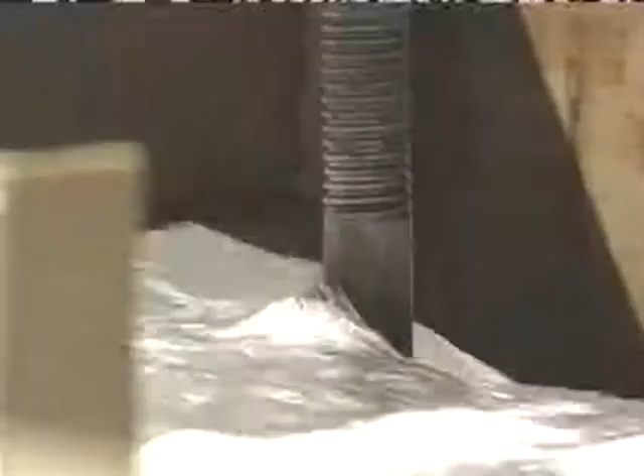The Tampa Bay Water Desalination Plant is the only operating seawater plant of its kind in the country. The plant serves about 2.5 million Florida residents in Tampa, St. Petersburg, and the surrounding area, providing 10% of the fresh water supply, or about 25 million gallons a day. To change seawater into drinking water, the plant uses a process known as reverse osmosis, or RO.

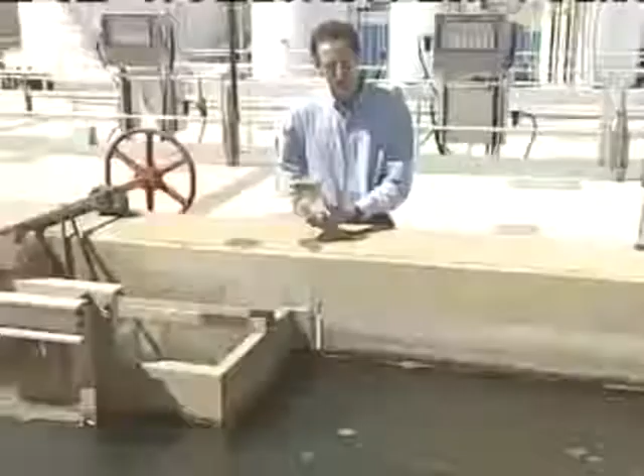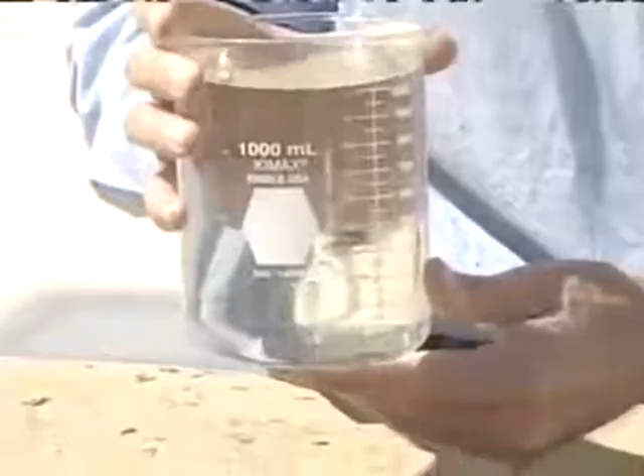This is raw seawater. This is the water before it goes into the first stage of the filtration system, the sand filters. The sand filters are the next stage of filtration before the water gets into the RO process. The water is pumped through filters to remove impurities before entering the reverse osmosis system.

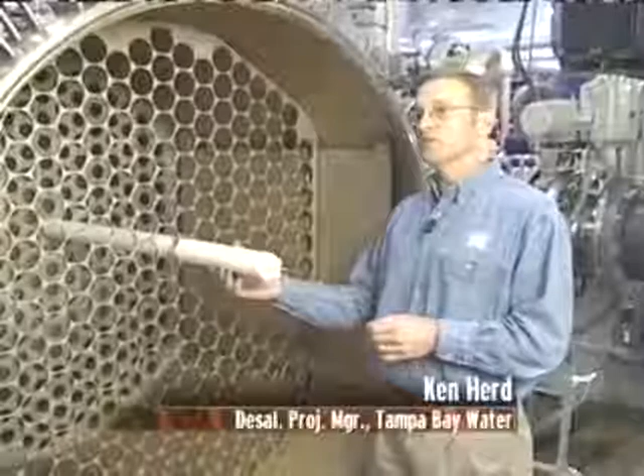These are 5-micron cartridge filters that are made of like a yarn substance. These filters are able to capture any suspended solids that may make their way through the sand filters. We don't want any particles, any suspended particles, passing on beyond this point in the process, because that could result in fouling of the reverse osmosis membranes.

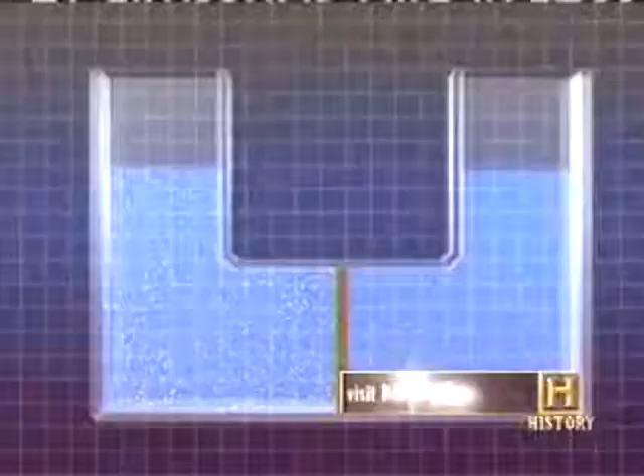In regular osmosis, when two water volumes are separated by a semi-permeable membrane, water will flow from the side of lowest concentration of soluble matter, like pure water, to the side of highest concentration of soluble matter, like salt water. In reverse osmosis, pressure is exerted on the side with a concentrated solution, the seawater, to force water molecules across the membrane to the freshwater side, in effect, filtering out the salt.

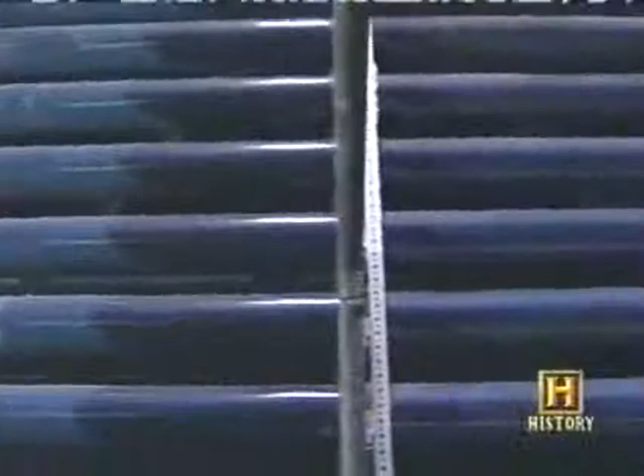Following the cartridge filtration step, the saltwater pressure is then boosted with this 2,000 horsepower high-pressure pump. That pump pressurizes the water up to 1,000 pounds per square inch. That's enough pressure then to pass on to the membranes, which is really the heart of the reverse osmosis process. Each one of the blue pressure vessels contains 8 of these reverse osmosis tubes.

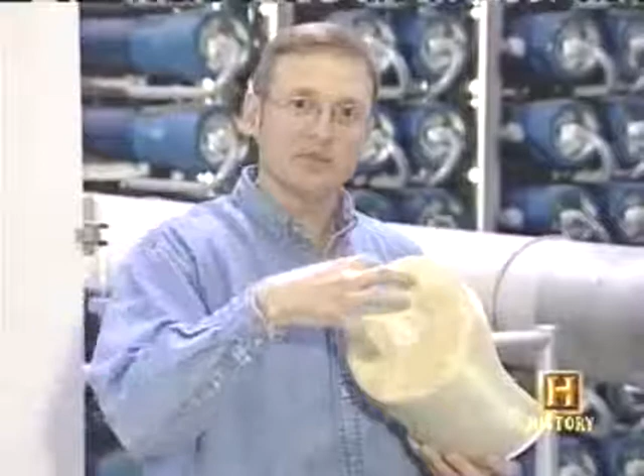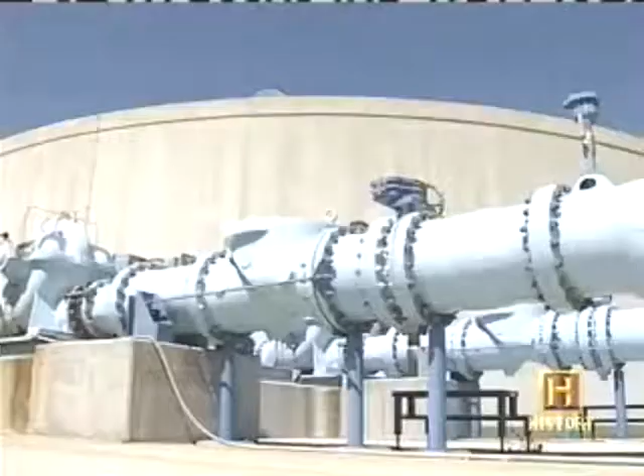This is a cross-section of a reverse osmosis membrane. The way this works, the salt water under the high pressure, 1,000 pounds per square inch, is passed into the membrane. That high pressure forces the fresh water through the membrane, leaving behind a salty, concentrated solution. In the entire plant, there are 10,000 reverse osmosis membranes. If you unrolled all these membranes and just put the membrane surface area back to back, it would stretch for 223 miles. The concentrated seawater left over from the desalination process is diluted and released back into the ocean.

The desalination project at Tampa Bay is being studied closely by other water departments across the U.S., including the Metropolitan Water District of Southern California. The question will be when we go there, not whether we go there, in my opinion.

A seawater desalination program in Southern California could be a very important complement to the other water resources, so that when we have droughts, or if we had an earthquake that knocked out one of our pipelines from the Colorado River or the State Water Project, you have a palette of resources that you can draw upon, and seawater desalination would be a nice complement to that.

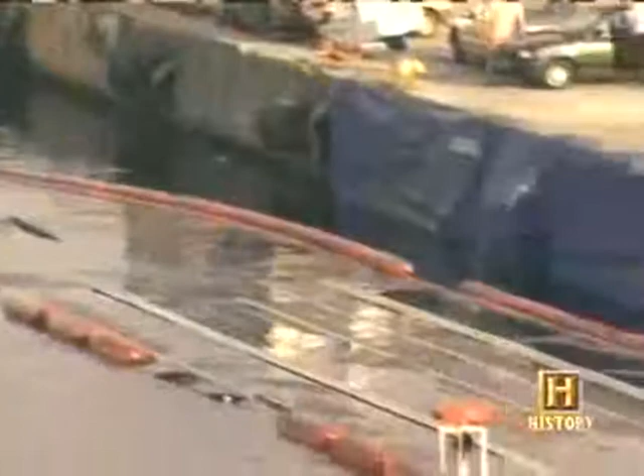As fresh, pure water becomes an increasingly valuable resource, some experts are calling it the new oil, and predicting that wars may someday be fought over it. Ideas that would have been considered bizarre a few years ago are looking increasingly viable. A Greek company, Aquarius Water Transportation, has been supplying fresh water to several Greek islands using huge floating plastic bags. The bags, which are towed to the destination by tugboat, can each hold nearly 8 million gallons of water.

Another company has proposed wrapping entire icebergs in plastic and towing them to locations that need water. 70% of the Earth's fresh water is locked up in the polar ice caps from which icebergs are formed. People have been talking about icebergs for a long time. It's sort of a captivating idea, and there are certainly areas of the world that have limited options, and just towing down an iceberg to areas of the Middle East or even some islands in the South Pacific that are limited in their water supplies could be very attractive.

Futuristic techniques like these may be practical in isolated applications, but for the most part, public water supplies seem destined for the foreseeable future to continue using tried and true methods, some of which date back thousands of years. It's hard to beat rivers, reservoirs, pipes, and pumps, but unless today's water planners have the vision, foresight, and public support that their predecessors had decades ago, the consequences could be dire.